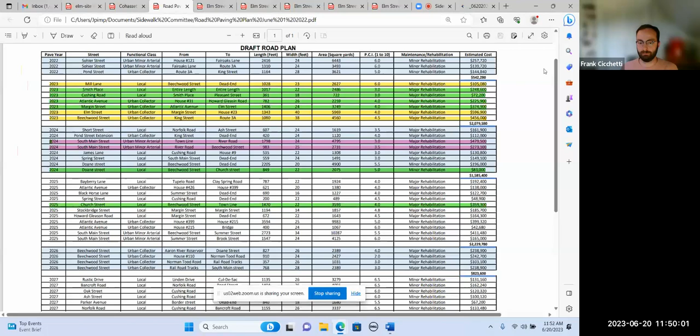Let me know when you can see my screen. Yep, all right. So just a reminder for everybody, the green is the projects moving forward in the next few months: Smith Place, Cushing Road, Atlantic Margin. The yellows - and I jumped down to the other 2024 and 2025 - the Church and the Doane.

The yellows are kind of in a holding pattern right now, pending a few other things. But I want to talk about the money, because this may play into what this committee is really trying to do when we talk about prioritization.

Brian, correct me if I'm wrong, but the Smith Place and Cushing Road estimates, which were 248 and 72,000 for a total of 320,000 - the quote actually came in at $155,000. So doing my high school math here, based on our budget but real numbers, we've saved $165,000. Yeah, so we knew these estimates would be higher - the ones on the spreadsheet we're looking at are MassDOT, better pricing than them.

But again, they're estimates - there are things not captured in there, like drainage work we need to do right now on Smith Place, and things not in the TL Edwards estimate. But yeah, I think there definitely is a savings there.

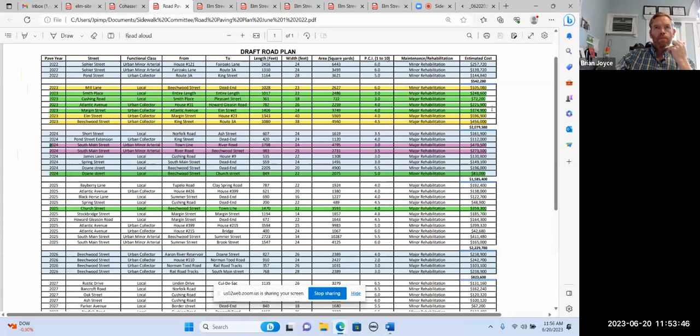So those are the projects that are, as of right now, is there anything else on the table to move forward with that's a guarantee? I don't know if you need me to share that screen again. No, it's all right. Just Elm Street - I've been bugging Lenny kind of daily on this. He's still working through the quantities of curbing and getting estimates on that.

Hopefully by Thursday - he told me this morning he would have it. So we're still working on that, and the hope is that once we have that, we'll get that done as soon as possible.

So those are the projects that are in front of us right now, pending the Elm Street and where that really goes. Well, there could actually be some leftover monies, but we'll deal with that when we come to it.

Any questions on the upcoming paving plans from the group?

As you have seen here, Mike Sardina from Sardina Landscaping is graciously here to give us a quick update on the Elm Street plan. I know we've talked about this quite a bit. It would be really great if this committee - the intent here would be to ask questions and maybe give this a formal thumbs up as far as the plan in front of the group. Because if this project is paved over, we certainly want to be able to answer some questions from the public, etc.

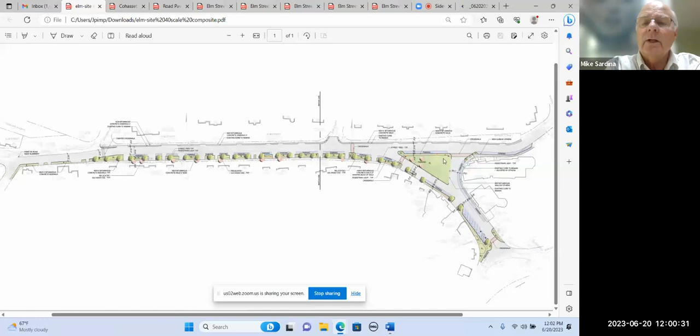Elm Street bends down to intersect with Border Street and with Summer Street, so the Elm Street improvements basically have a Y in them. We also have that little leg of Cove Street right there by the triangle, which is part of the project as well. If we can start zooming in at the left end.

The road improvements basically mean that we're going to have a consistent 24-foot wide roadway, travel ways if you will. So two 12-foot lanes that start down here at the Brook Street end and go essentially to Margin Street. As we go further east I'll tell you about the 22-foot sections. Basically what we've done is eliminated the parking on the north side of the road, we have parking on the south side only, which netted us an additional 8 feet of improvement opportunity.

On the north side of the road we have improved and rebuilt sidewalks 4 feet wide to the curb line. On the south side we have 6-foot sidewalks, where the limit of the new sidewalk improvement is the back of the existing sidewalk. The plan shows the sidewalk on the south side with basically a beige color as opposed to the gray on the north side, just to show we're trying to make this part of an aesthetic system, better than what we currently have, where we have 4 feet against the curb line. Here we have a 6-foot sidewalk adjacent to the existing landscape on the house side of the walk, and a generally 6-foot section of lawn between the sidewalk and the relocated curb line.

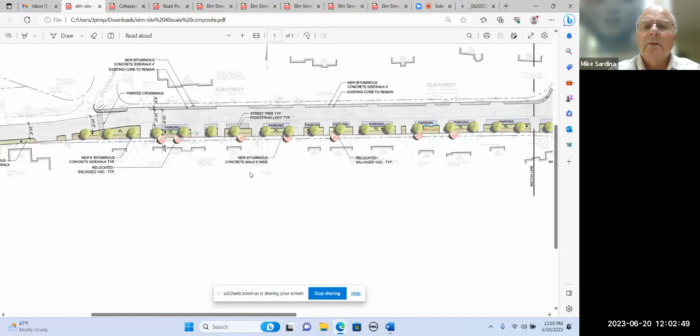As you can see in this plan, the street trees are intended to find a rhythm in terms of their spacing, given the number of curb cuts we have here. They're averaging between 40 and 50 feet apart, most of them in the 45-foot range. We also are showing here, it's hard to see on this plan, but there are little black dots, little black circles within the green strips that are proposed pedestrian lighting. The pedestrian lighting is generally between 12 and 14 feet in height.

It's dark sky compliant, and it adds another layer to the system, if you will - the system being sidewalk and grass, street trees, and lighting, which makes this a sort of unique connector between the village center and the harbor itself. The street lights on the poles on the north side of the road will remain. That basically is lighting the road, it's lighting everything currently - there's no lighting on the south side. So the additional lights on the south side, if we can afford them, would be obviously for pedestrian safety and also for ambience.

The street trees that are green are the proposed trees that do not exist. The trees shown in pink are the existing cherry trees within the right of way. You can see there's a dashed line running through those cherry trees - that's the actual property line for the road. Parking is going to be defined by paint lines.

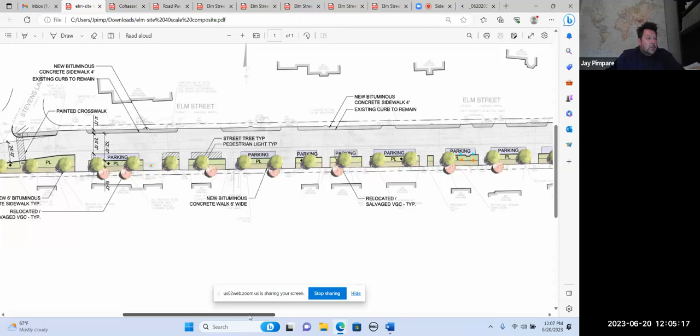And what's the caliper and size of the elm trees you're proposing? Well, that's to be determined. Ideally, they'd be probably in the 2.5 to 3 inch range when they go in as caliper size. That means that about 3 or 4 feet off the ground, that's about what the caliper of the tree would be, the actual diameter of the trunk.

So it all depends again on costing. Ideally, you're better off putting in smaller trees than larger trees, because larger trees take much longer to come out of shock. By the time you get 3, 4, 5 years down the line, the smaller trees have already caught up to the larger trees once they get started growing. So I would think we're going to be in the 2.5 to 3 inch range, which means the trees would probably be plus or minus 18 feet, 16 to 20 feet tall.

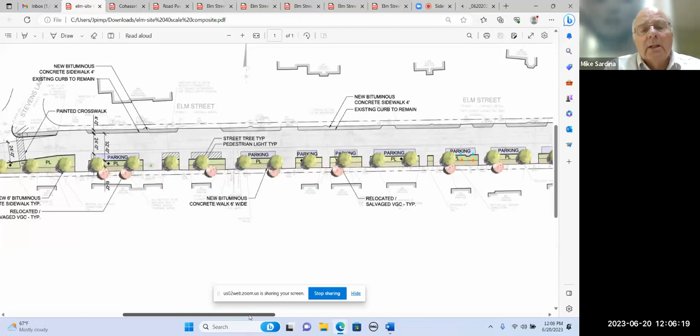And presumably all come from the same nursery and all have pretty much the same appearance. Ideally, they'd be almost like clones, and we go from there.

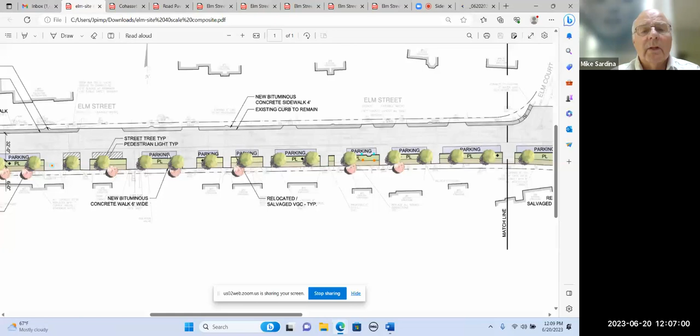As I was saying about the parking, it's going to be defined by paint lines, just like the improvements done on North Main Street, opposite the Common. The parking lines, which do not exist now, actually define the roadway travel ways by having an edge there, a white line, as opposed to nothing. Elm Street almost feels like 4 lanes right now because there's no paint lines anywhere other than down the center of the road. So that's another improvement where we hope this is a traffic calming method of defining the road edges.

As we move to the east, we come to our first crosswalk just near Elm Court. That crosswalk was definitely one of the items that neighbors on Elm Street participating in the public forums we had back in 2020 requested, almost demanded, because the bus stop for the kids is on the corner of Elm Court.

So that's the first of 4 new crosswalks associated with the improvements.

As we come around the corner, around the bend, the south side of the triangle, the back of sidewalk is literally on the property line, as you can see. So the little section of roadway on the south side of the triangle is going to be 22 feet wide, slowing down traffic and not impacting the size of the island in any appreciable way. There's a curb line shift just a tiny bit, which allows the 6-foot sidewalk to be continuous, parking to occur along that section, and the roadway to be 22 feet wide.

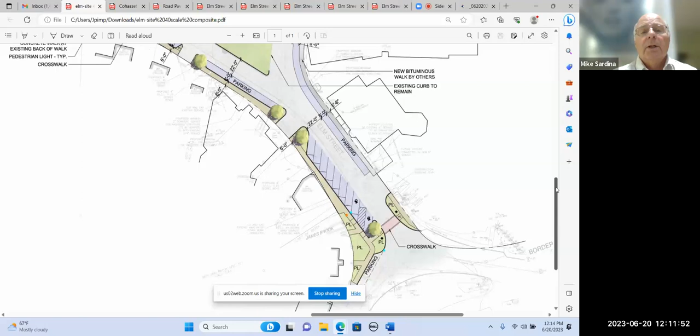The point here is that the parking on Cove Street, and as you go down towards Summer Street, is in lanes that aren't defined, making it feel much wider. Not many people park there because they think they shouldn't, but that's going to be defined by the paint line on the road.

So as we go down towards the Summer Street intersection, the angled parking is being maintained where it currently exists at 45 degrees. That angled parking is currently shorter than it's supposed to be per parking stall dimension standards. In conversation with Brian about this, the curb line on the condo side stays where it is, with straight paint lines for 8 feet of parking, and maintaining the proper lengths for the angled parking.

This section is also proposed to be 22 feet, as shown by the cursor. So from basically the Border Street and Summer Street intersection up to Elm Street heading towards the village, that's going to remain 22 feet through there.

We are squeezing down the intersection considerably at the interface of Elm and Summer and Border, so we don't have that huge expanse of pavement where the crosswalk is. So we now have a crosswalk that's safer and more serviceable relative to big turning movements.

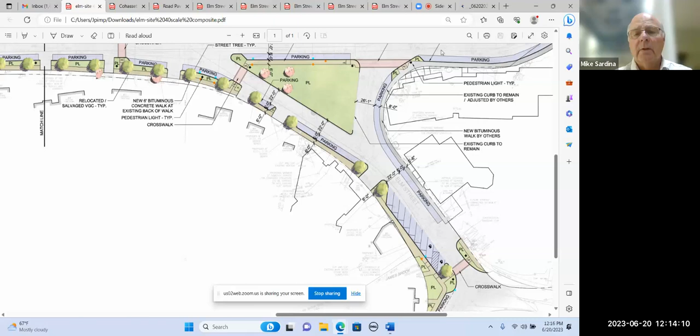So that pretty much summarizes the intent for the plan. Our hope is that this is not a complicated project from a construction standpoint - actually very straightforward. The contractor has admitted it's a straightforward project, so there's no real magic to anything here. There shouldn't be any considerable unknowns.

There's very little utility work that has to be done, and that has to do with storm drainage, where the current curb lines being shifted out from the drains currently along the curbs would just become manholes in the space between the curb line and the back of the sidewalk, and new drop inlets would be put against the new curb line location and tied back into those pretty simply.

There's no electrical, there's no water - there's a few water valve boxes that have to be raised in a couple places where that's currently in the street that would now become sidewalks. Other than that, we've maintained this project is basically curb lines, paving and striping, and of course landscaping, the trees and the grass. It's a pretty straightforward project.

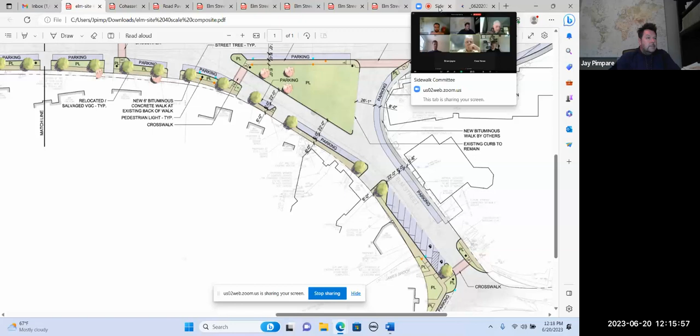That's pretty much what we discussed with them. They did say that for certain things, they do subcontract out work, like the electrical work, the light poles and circuitry would be done by somebody else that they would subcontract.

Correct me if I'm wrong, Brian. Yeah, so they also have all the basins and the raise and reset of any structures out there for utilities. And they wouldn't be installing any of the street trees or the grass system, so that could be a subcontractor, or it could be part of the town's work.

Yeah, so they will be quoting, and we could remove it if they want, but they will do a loam and seed of the grass areas where there wasn't previously. The trees would be on us.

Just one thing on the trees, I think we should look at the size of the elms and make sure they're good for a pretty decent amount in the future, that they don't get too big. I know some elm species get to where the width and height can be equivalent, and they could take over any wires or anything like that.

And just in front of the fire station, it occurred to me as Justin was going through it, we may want to either eliminate or shrink down those islands across the street in front of the fire station. They already have paint lines, but the trucks come in and do kind of a 3-point turn right there to back into the station when they come back from a call. So we want to touch base with the chief on that and make sure—could save some curbing. We could just paint that area and keep a couple of trees.

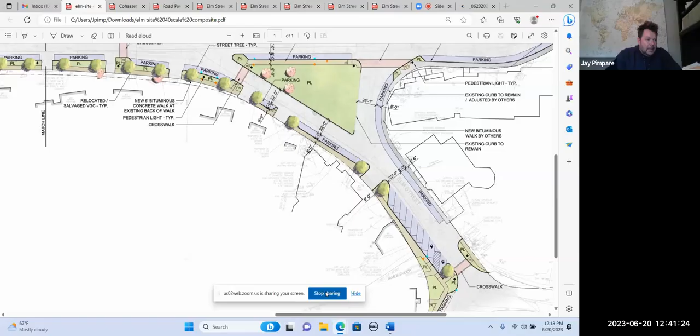Okay, all right, everybody. Yeah, thanks, Mike. The next item was the setting of the criteria. I sent that out to everybody. I didn't get any response from anybody as far as any negativity. I want to bring up one thing, and I don't want to go past 1 o'clock.

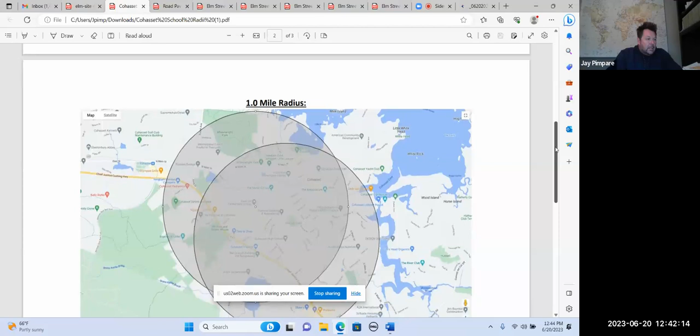So this was the criteria that we had come up with, and I want to talk about the school connectivity a little bit in the mapping. Frank, thank you very much - Frank had put together the radii of 0.5 miles, 1 mile, and 1.5 miles. This was 0.5 miles, just to give you a flavor of what that looked like from the two schools, the Osgood and the high school. And then we used a 1 mile radius, and then we have a 1.5 mile radius. In Cohasset, which almost covers the entire town, if you live outside of the 2 mile radius, you are allowed to take the school bus.

If you look at that 2 mile radius, that pretty much wipes out almost all of Cohasset, even though it brings you up around Jerusalem Road and Straits Pond, even though the school bus goes through all of these areas of town anyway. So what I was getting at is I wanted to talk about what you feel this number really means. What does it mean if we identify 0.5, 1, 1.5, or 2 mile radius as far as setting the criteria? In my view it's almost just a number, but I don't know, does anybody have thoughts looking at those maps?

Let me weigh in on this. What I did, once I saw what Frank had done, which was a great job, is I realized it's probably too wide a radius, even if it's a half a mile. So I said to myself, what is the actual requirement that the schools follow? I contacted Ellen Marr, and she sent me the explanation, and I'd be delighted to read it. It's not too long, but it also changes our thinking somewhat as to what we would recommend in the way of sidewalks. So if you're tolerant of me reading a paragraph, we can go to it.